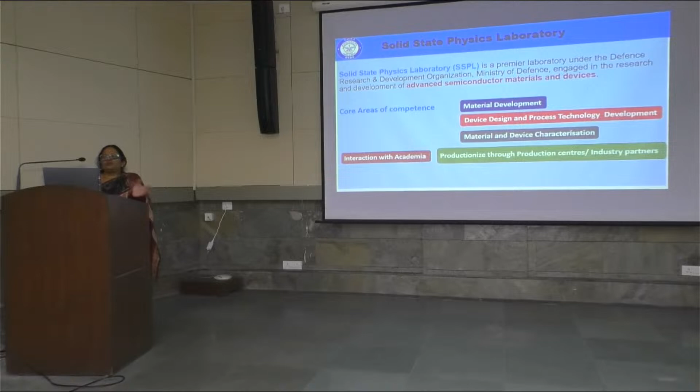So in the past, whatever we have developed at lab level, if we had to deliver a certain number, we used to do it in the lab itself. But somewhere in the mid-80s, we started developing our own production center. Primarily, we have two production centers. One for III-V gallium arsenide, gallium nitride, which is called GATEC at Hyderabad. And then we have a center called STARC at Bangalore, and it works on all the MEMS technology and other sensors. So these are our two production centers.

And we have a very active interaction with academia. And now the emphasis from DRDO side is also that we have to interact with academia. So whenever we take up a project, the design and whatever academia can contribute, we are looking towards it. And the thrust is also that whenever we take up a project, because we have to convert whatever we are developing into a product, we have to handhold the industry partner right at the beginning when we conceive the project. So this is the model which DRDO is following right now and what we are also following.

So basically these are our areas of work. We are working in a variety of fields. We are about 350 personnel, with 150 scientists and 150 technical staff. And we work in the area of RF devices, basically gallium arsenide, gallium nitride. And we start right from the material to the device to productionization at GATEC, as I mentioned.

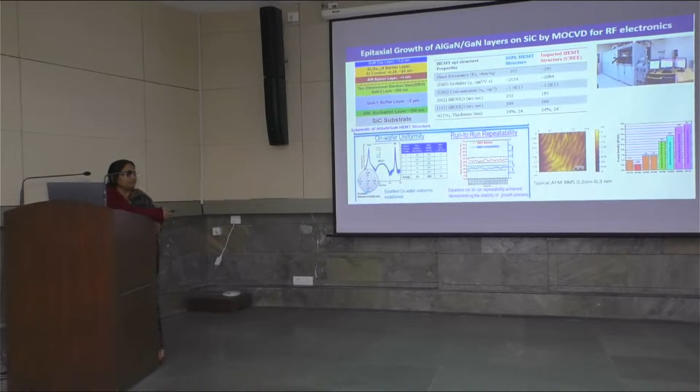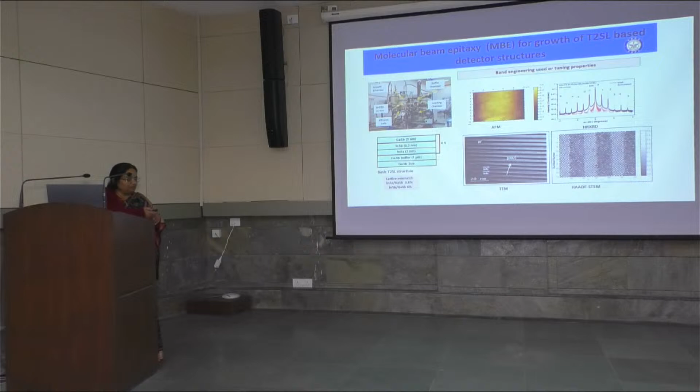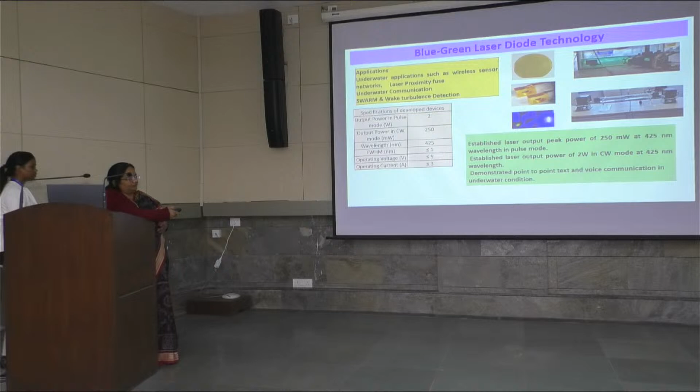So now this sensor system plus the data acquisition system, because the sensors are placed where the avalanche is expected, and then you have to generate a lot of data. So these are placed and data is collected throughout the year, and this is then given to the user, who then develops a model for avalanche predictions.

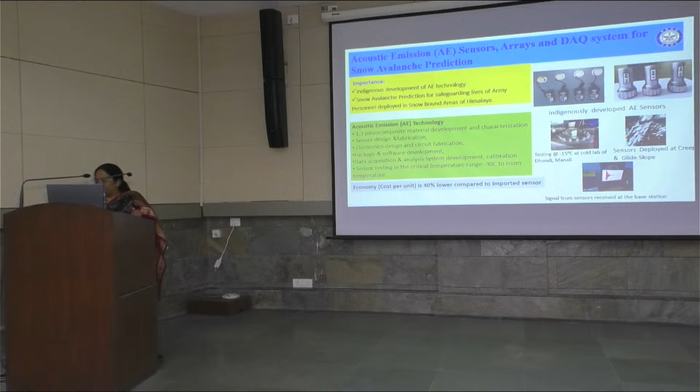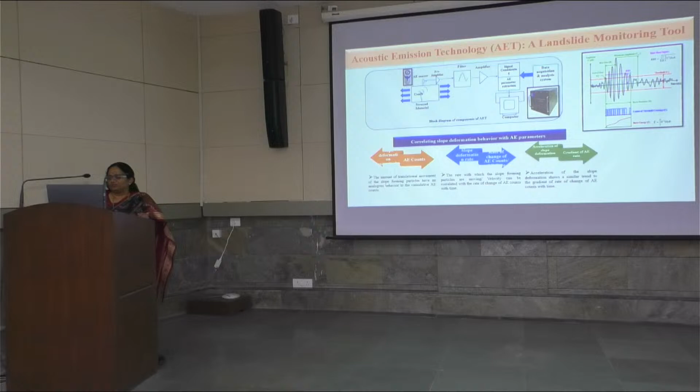So this is one technology we have been working on, and as a consequence of this, we are also working on landslides. It's a similar principle, the design is different, and the same thing, that you have to place your sensors at vulnerable areas and collect enough data so that you can develop a model for prediction in future. The model is not our job, we basically develop the sensors, sensor and the sensor systems.

This is very important because there are several places where you would like to know the temperature during operation. Suppose you have a turbine rotating at very high speed and you cannot place your sensor there, you need to have it in a wireless mode. So this is a possible solution which we have taken up recently. Basically you have the sensors mounted wherever you want the temperature during operation, and then you have an interrogator unit which sends a signal and you can collect data so that you get a real-time picture of what is happening while the system is operating. This is basically the same thing.

And then we have a CNT-based chemical sensor. CNT work was done about 7 years back, and based on that, some sensors have been developed for detection of ammonia and NO2. This has now been tested, and we have made the prototype, and it has been given to some users so that they can test it out. The fabrication of this we are now doing at STARC. It has not yet started, but this is what we plan to do.

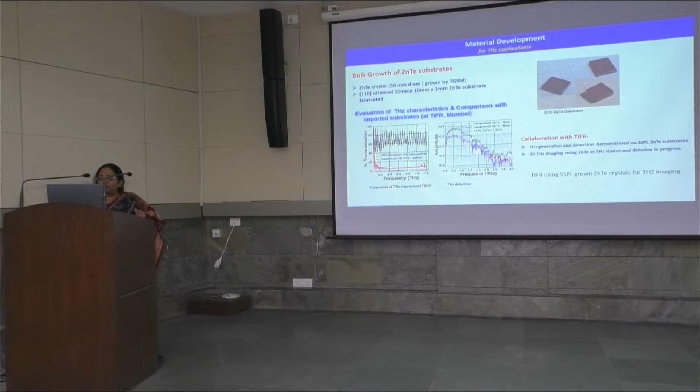Then zinc telluride is another terahertz material which we are working on, again for terahertz transmission and terahertz detection purposes. There is a very active group at TIFR which has been working in this area. So we have given our substrates to them, whatever we have developed. They have tested it, and now they're in the process of developing the complete terahertz system for imaging using this. Then graphene based terahertz modulator and detector have also been developed. This has been demonstrated. Now we have to work further to develop the systems.

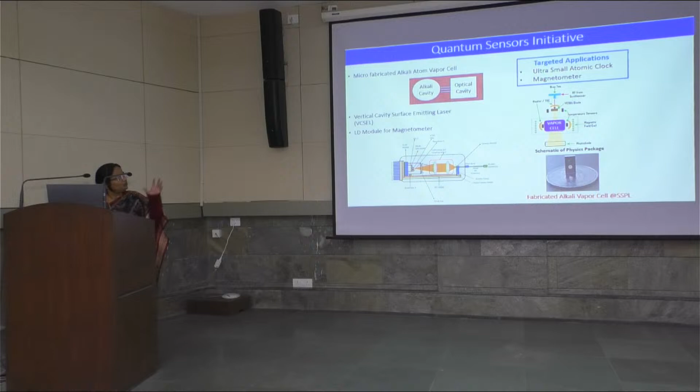Then there is a quantum sensors initiative also. Basically, we are working on 2 applications, which are the ultra small atomic clock and magnetometer. Wherever there is no GPS, you need to have the communication, so the atomic clock is targeted for that, and the magnetometer for underwater application for detecting the magnet, ultimately for submarine detection. But these are at the nascent stage. The concept is there and the design is there, but when we are actually executing it, you see that there is a lot of gap in the electronics which we need to develop, and that is what we are right now looking at. So these are some of the things which may be of interest to all of you.

So if you want to know how DRDO is interested in working with the academia, right now there is a strong thrust on DIA CoE, that is the Defence, Industry and Academia Centres of Excellence. About 15 of them have been opened in various IITs and IISc, and you can look at our website on a range of technology. Basically, the idea is to build multidisciplinary collaborative teams for development of advanced technology for futuristic defence. So they want the student community, the academia, the niche technology industries to come together to provide these solutions.

And the other way in which academia can collaborate with us is through our directorate of ER and IPR, in which basically you submit project proposals and they screen them for the application to defence. If they get through the screening, then they are sent to the domain lab, whichever is interested, and then they are evaluated and processed for further sanction. Apart from ER and IPR, we also have 4 research boards: aeronautical, armament, life sciences and naval. You can go through the website and see where whatever work you are doing fits.

And then there is another mode which is initiated at the lab. Suppose we have a project and we have a need, a gap somewhere which needs to be filled, a knowledge gap or technology gap. Then how we go about it is we look at literature and look around us and see who has some experience in this field. Then we contact them, take proposals from them, have discussions with them and see if they can help us fill that knowledge gap. So most projects now have 1 or 2 CARS proposals right at the initial stage before the project is taken up.

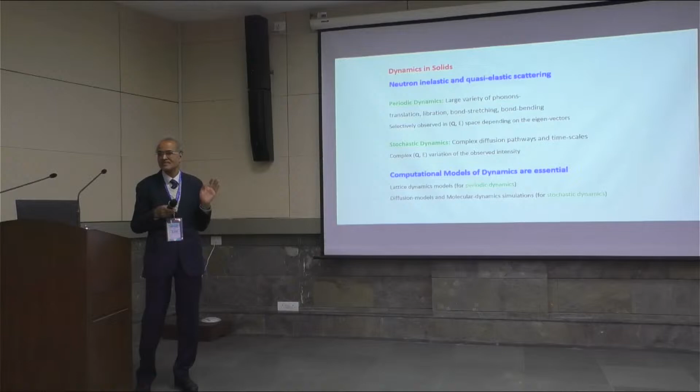So the subtopics we work on are, you see, dynamics in solids. There are two kinds of things. We have periodic dynamics like phonons, etc., and we also have stochastic dynamics like diffusion. Okay, and so we primarily use the technique of neutron scattering. There are two varieties: inelastic scattering and quasi-elastic scattering. You can see the periodic dynamics as a large variety. And now, because these are so complex in complex structures, you heavily depend on computational models of the dynamics.

Yes. Okay. So, inelastic scattering is used to study periodic dynamics, and quasi-elastic scattering is used to study diffusion. And the kind of things it has is phonon dispersion relations or diffusion, and data analysis are done by lattice dynamics and molecular dynamics. To go a little further,

so neutron scattering is like Raman scattering. Essentially, what happens is you have an incoming radiation, you have a sample, and you have outgoing radiation in different directions, and you look at the energy and momentum conservation. So, like in Raman scattering, the radiation energy changes, and the change in energy is related to what excitations we are talking about. And similarly, there is a change in momentum. In diffraction experiments, for example, this is very different. So, what you need to really look at is the change in energy and momentum of the neutron radiation, and that allows you to study the dynamics.

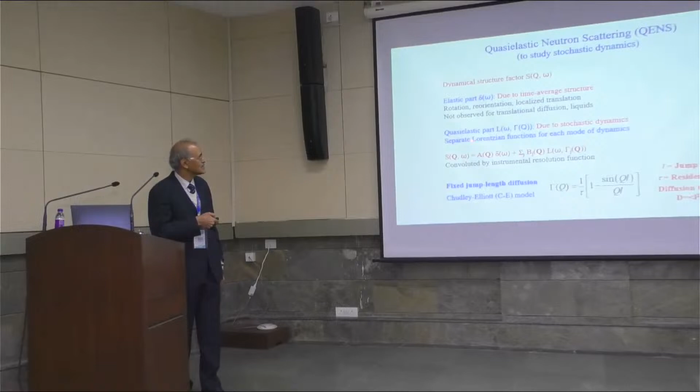Okay, so if you fit it with a Lorentzian function, then this width of the Lorentzian can be related to the different kinds of modes of the dynamics. So this is a fairly involved process, but well, I don't have to bore you with all that. I mean, just to give a flavor that these are the kind of things that are done. So you do the fitting and so on.

And then the width of the Lorentzian function, that is the width of the broadening of the elastic line as a function of the momentum transfer, can be related to certain models. This is one of the simplest models. For example, in a crystal lattice, atoms don't diffuse exactly like a liquid. They may be jumping from site to site, and there is a certain time it takes for a jump and so on. So typically one can think of a residence time between two jumps.

How long does the atom stay at one place on the average? This is stochastic, so these are not fixed numbers, and then the diffusion coefficient can be found by substitution. So this is one of the simplest models for these processes.

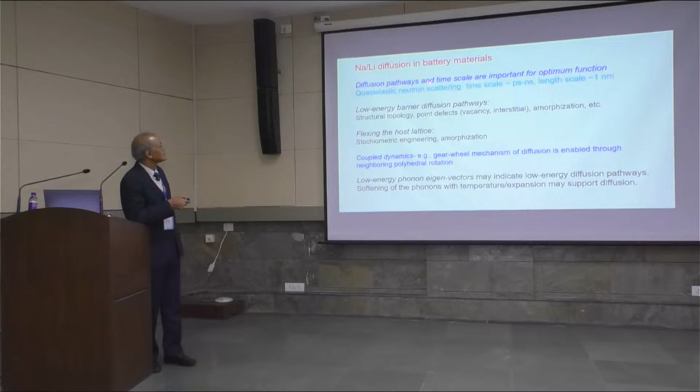Okay. Now coming to certain specific aspects. So we are interested in lithium or sodium diffusion. For lithium, you are very well familiar, lithium batteries are used, and right now one is interested in whether you can improve upon the solid materials. Maybe lithium in a liquid state would be different, but solid electrolytes are a focus, which are more convenient to handle, and there are certain advantages.

And alternatively sodium, because lithium is in short supply and has its own problems, and sodium is abundant. So there is a focus on sodium battery materials. Okay. Now, as basic scientists who are interested in the atomic-level understanding of these materials, what are we interested in? Okay, crystal structure is one that crystallographers can look at and so on.

What we are looking at is the diffusion pathways and time scales. So within a given crystal or solid, what are the diffusion pathways and what are the time scales at which the diffusion processes take place, and how this can be beneficially improved upon for practical uses. So this is the eventual aim.

And then you can very well imagine that you are looking for low energy barrier diffusion pathways. If the energy barrier for diffusion is small, then those will provide preferred pathways. And that is what we would like to find out within materials. And these can be helped in various ways.

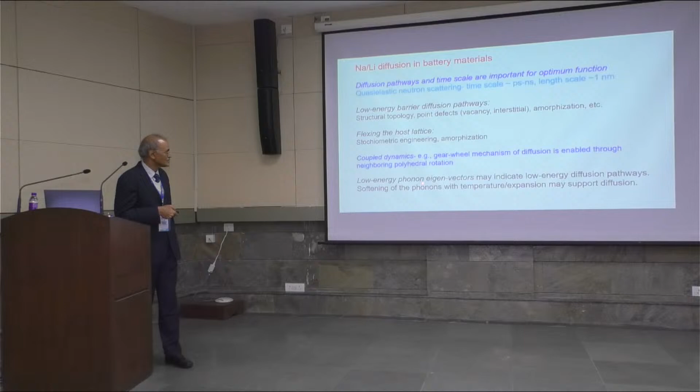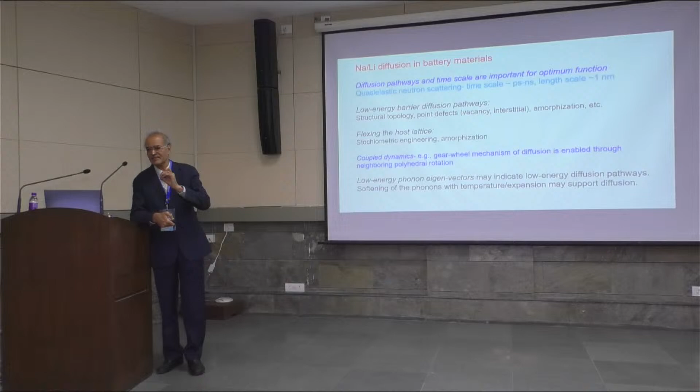Okay, then it is also found that, depending on how the structure is engineered, you may find very low energy phonons associated with the diffusing lithium or sodium atom. As I said, it's not a liquid-like diffusion. Most of the time, the atoms are located at definite sites and they jump from site to site, and that is how the ionic conduction or diffusion takes place.

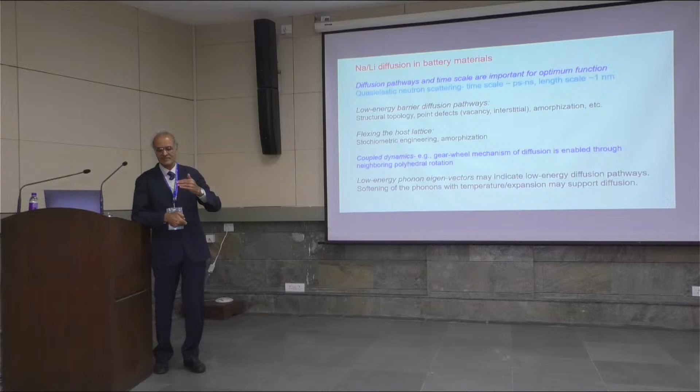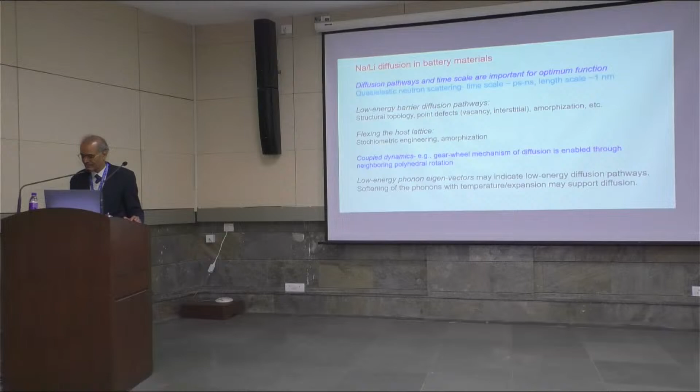So, low energy phonons, and the eigenvectors of these phonons may be related to the low energy diffusion pathways. And moreover, the softening of the phonons, that means the reduction in the phonon energy or frequency as a function of temperature or thermal expansion or by other means, can be supportive. So this is the broad outline. Now let me take a few examples that we have investigated.

Okay, over the last few years, or couple of years, we have looked at materials like sodium aluminum silicate or lithium aluminum silicate. These experiments were done at the Oak Ridge National Laboratory, and we have done all the...

Okay, see, the way we operate is that we do certain preliminary work in our center, and we propose experiments to these advanced laboratories, and we get the beam time. Then we can use it and get the data, analyze, compare with our models for the computational calculations, and then try to get the things out of it.

Another is the amorphous materials. As I said, amorphization also helps. Then one recent paper that we have published is on a sodium zinc gallium sulfide material, where the topology of the structure is found to be very suitable for diffusion.

Okay, then there are some recent papers on phonon related aspects. These same technologies are also useful for, for example, solid oxide fuel cells, where the diffusion of oxygen atoms is very important. So, fuel cells can be... okay, so the first example I will take is

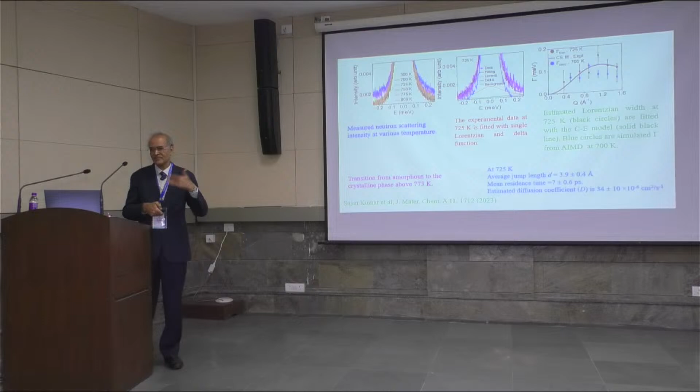For that there can be other experimental methods, but what we have done is through simulations, and then you can find out. So, for example, the typical average jump length of the lithium atom is typically 4 angstrom, which is related to some kind of interparticle distance, and there's a typical jump time of a few picoseconds. There is a certain diffusion coefficient.

Okay. Now you can also, for example, in a simple molecular dynamics calculation, calculate the mean square displacements of atoms. In a crystalline material, the mean square displacement does not change with time. These are just the phonon vibrations. The mean square displacement is practically independent of time, and it increases with the temperature. But this does not indicate diffusion. However, if the mean square displacement increases with time in a molecular dynamics simulation, then that indicates diffusion.

Okay, so in this amorphous material, the diffusion coefficient is related to the slope of this function. So from that one can identify this. Then another quantity that is calculated is what is called a self-correlation function. It's a correlation function between a lithium atom at a given time and at a future time.

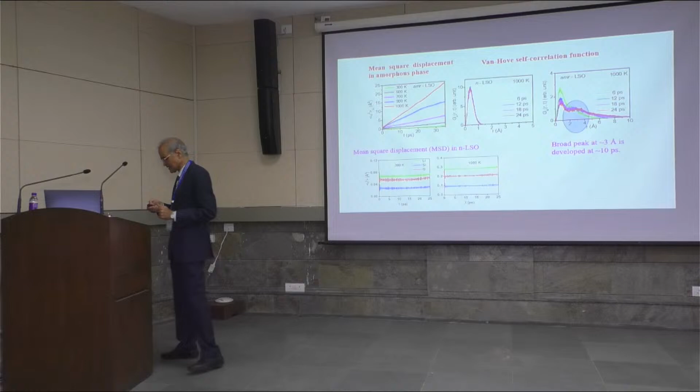If you calculate that, in a crystalline material what you find is that there is just one peak, typically, let's say, half an angstrom, and this is related to just the mean square displacement, phonon kind of vibration. However, in this amorphous structure where there is diffusion, the self-correlation function first develops a second peak and then further broadens. This indicates how, as a function of time, the atom is jumping from an initial site to another site. So that's how one can look at it.

Okay, how much time do I have, sir? You can continue. Okay, fine, thank you. You can stop me anytime.

So in the molecular dynamics simulation, as you know, you calculate the trajectories of atoms as a function of time, typically in the order of picoseconds. If you look at this, for example, in a crystalline material the atoms are located at definite sites, whereas if diffusion is taking place, this will not be so. These are just the probability isosurfaces.

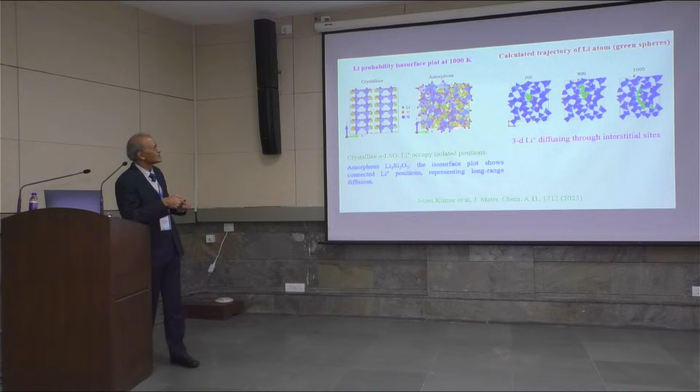Incidentally, the temperature has to be very high because in a small simulation, see, in the real world you can go up to seconds or minutes, but in simulation the atomic trajectories are calculated over a fraction of a picosecond. Precisely for that reason, if you increase the temperature, you can accelerate the process. So it is artificially done. This way one can identify what exactly is happening at the microscopic atomic level.

Then if I just pick up one atom and see how its root mean square displacement is changing, in crystalline material it is a constant. Here, this is the displacement from the original position. You can see that it shows some variation, then it shows a jump. So this is like jump dynamics. Whereas in amorphous material it is more a mix of jumps as well as a liquid-like continuous process. So this is the microscopic understanding.

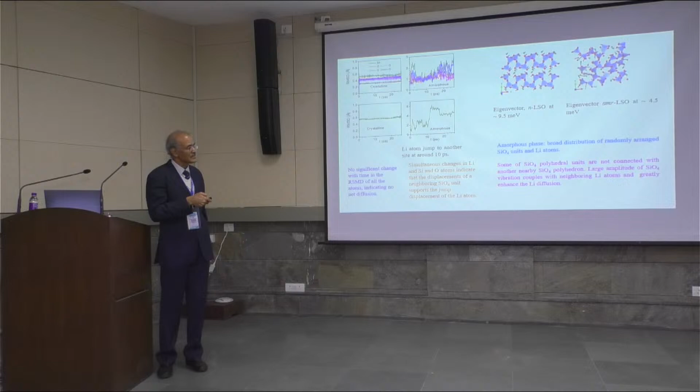And if you do lattice dynamics calculations where you can calculate the phonons and phonon eigenvectors, then you can identify specific phonon eigenvectors for different phonons and see what kind of dynamics is taking place.

Okay, so what we have learned from this is that the molecular dynamics simulations revealed that in the amorphous phase, you have different orientations of the silicate polyhedra, and several accessible pathways open up for lithium diffusion. This is not available in the crystalline material due to definite fixed orientations, so we are not able to see it.

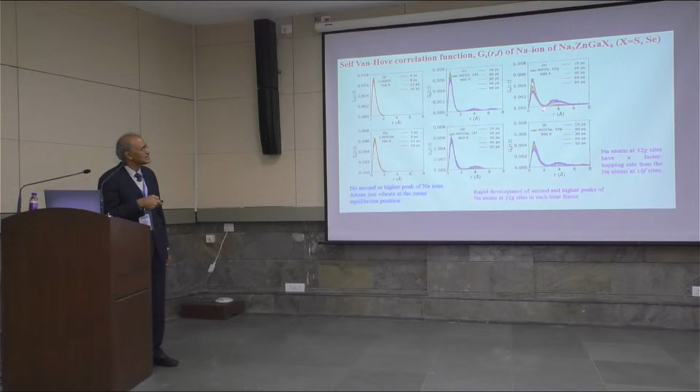This is again the self-correlation function that tells, as a function of time, how the second peak develops. The first peak is the self-correlation of the atom as a function of distance from the initial position at zero time. In the beginning, you have just phonon kind of vibrations, and as time proceeds, the atom would have jumped to another site at a distance, so the same atom at a later time is located at a different position. So this helps us identify the jump lengths and jump times in this process.

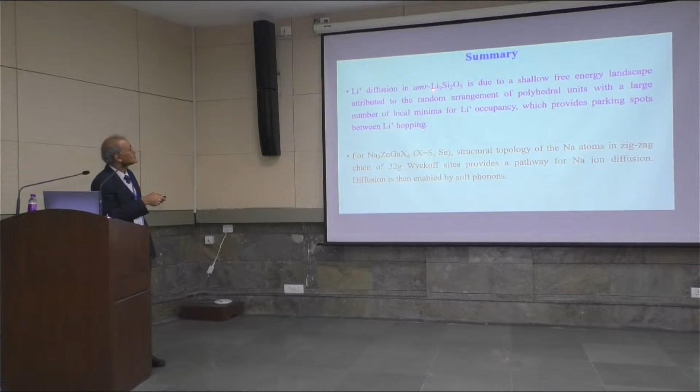So in this part of the talk, there are two things identified. In the amorphous structure, there is a shallow free energy landscape, attributed to random arrangement of polyhedral units with a large number of local minima. And in the sodium material, the second material, there is structural topology of the sodium atoms in zigzag chains of certain sites that provides the pathway for sodium diffusion, and the diffusion is enabled by soft phonons.

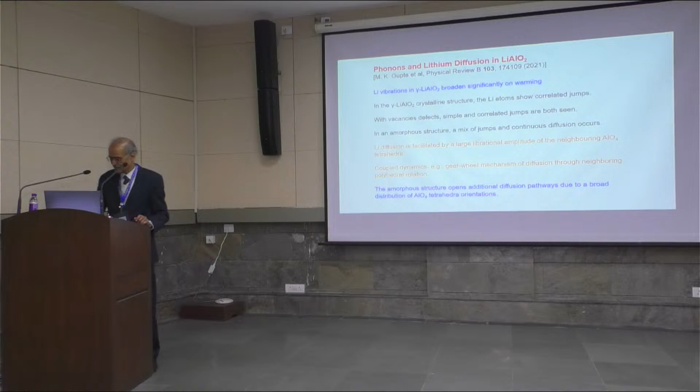How much time, sir? Okay. So, in no further time, I will jump over this other example and just go to the end.

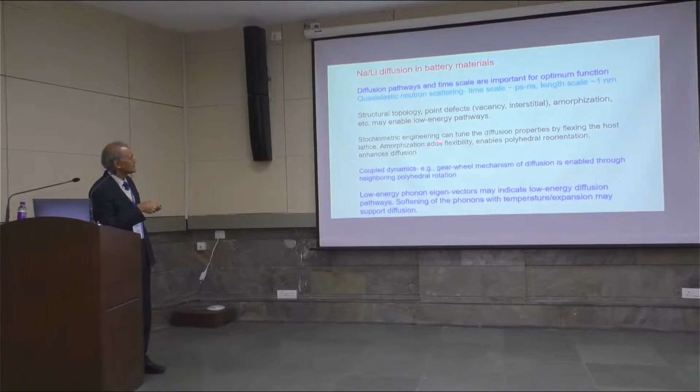So just to summarize, we have looked at the diffusion pathways and time scales, and the structural topology and point defects that are available. Then stoichiometric engineering can help in identifying the diffusion processes, by flexing the stoichiometry, coupled dynamics, and the low energy phonons.

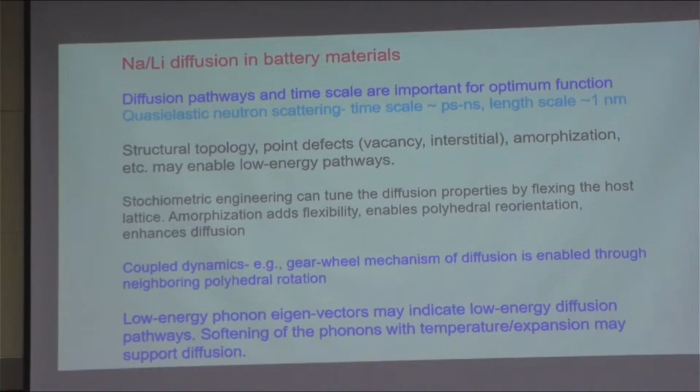Yeah, thank you. It was a fantastic lecture. It started with the energy devices, with the simulation of the experiment. For me, the beauty of this lecture is the physics and the atomic dynamic characteristics of the solid state material, which you have covered very nicely.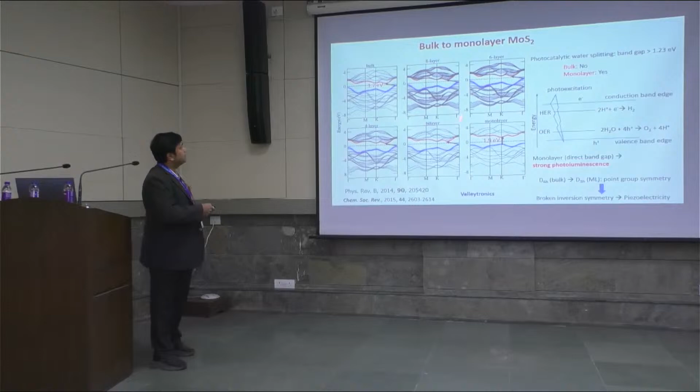So, as we are all aware, novel properties arise at the nanoscale, which are usually non-existent in the bulk form of the materials. We can use molybdenum disulfide, the most widely studied two-dimensional semiconductor, as an example to understand that. So, molybdenum disulfide comprises a multi-layered van der Waals solid, and when it is thinned down to the level of a monolayer, several interesting properties arise, like this and that. But we are particularly interested in this one.

So, as we are moving from a bulk multi-layered van der Waals solid MoS2 to a single layer MoS2, what happens is that the point group symmetry changes, the symmetry is lowered, the inversion symmetry is broken, as a result of which piezoelectricity as well as valleytronic properties arise in single layer MoS2.

Now, theory has preceded experiments in several instances, including the prediction of piezoelectricity in two-dimensional materials. Piezoelectricity in two-dimensional materials was discussed in this JPCL paper in 2012. And then a few years down the line, it has been observed and confirmed experimentally in these two papers from the Nature group. And the origin of piezoelectricity is the broken inversion symmetry.

So as you can see, this is the supercell of MoS2. Here the two atoms are different, so the inversion symmetry is broken here. Therefore, it shows piezoelectricity. However, in graphene, both the atoms are the same. The inversion symmetry is present in graphene, therefore it doesn't show any piezoelectricity.

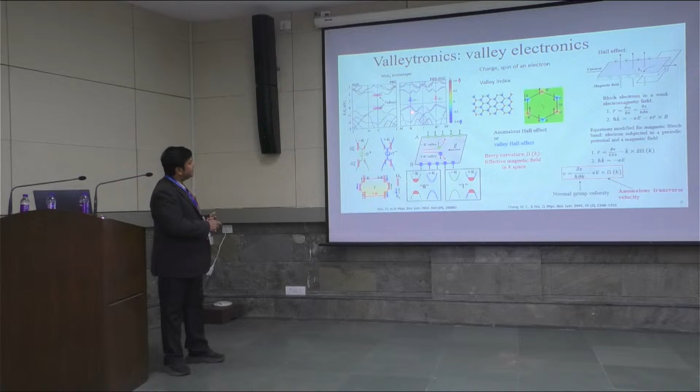So the carriers in this valley, upon the application of the in-plane electric field, acquire an anomalous transverse velocity, and the carriers undergo a Hall effect, which is called the anomalous or Valley Hall effect. And very few materials are experimentally known which exhibit the Valley Hall effect. Those materials are mainly MoS2-like, which show a large Zeeman-type spin splitting at the valence band and a very small splitting at the conduction band.

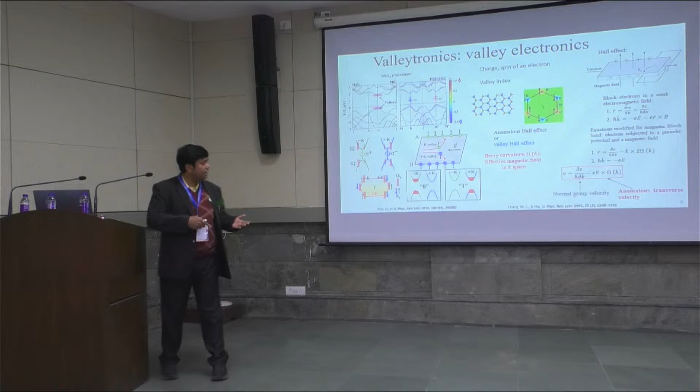So since this is an emerging field of research, in order to facilitate the development of this area, we have contributed a few monolayers. We have proposed a few 2D materials which show properties complementary to that of MoS2. So this is our little contribution to this area, and I'll be mainly focusing on these two works in this talk. So this HfN2 monolayer was predicted using the particle swarm optimization technique as implemented in CALYPSO, but we have explored the valleytronic properties in this material.

It shows a large Zeeman-type valley spin splitting at the conduction band edge, which is complementary to that of MoS2. It shows a large splitting at the valence band. Now, if you replace sulfur by a heavier element, that is tellurium, the spin-orbit coupling will be higher, and as a result of which the splitting will also be higher in this case.

So when HfN2 monolayer is stacked on top of molybdenum telluride to form a van der Waals hetero bilayer, a type 2 band alignment arises in it. As a result of which, we are able to realize a large Zeeman-type valley spin splitting at both the conduction band and the valence band. So this will be ideally suitable for valleytronics applications, because in a van der Waals hetero bilayer one can prolong the lifetime of valley polarized excitons. I will talk about the type 2 band alignment in the next few slides.

So then moving on, we have also proposed these monolayers for the integration of valleytronics with spintronics. This niobium nitride monolayer or tantalum nitride monolayer, they have a hexagonal honeycomb lattice and a polar buckled structure. Because of the polar buckled structure, an out-of-plane electric field intrinsically arises in it, which induces momentum-dependent spin splitting, and that gives rise to a Rashba constant.

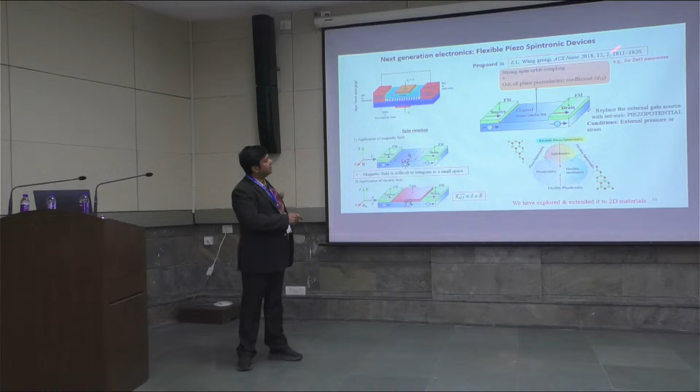And low dimensional materials by default have a low elastic stiffness constant, and therefore they are flexible and stretchable. Such a pointer was given in this ACS Nano paper by the group of Z. L. Wang on one-dimensional zinc oxide nanowires, and we have extended this concept to two-dimensional materials. So we have proposed a couple of monolayers which exhibit a combination of all these three properties, like ZnTe and CdTe monolayers. They have a polar buckled structure and a hexagonal honeycomb lattice as well.

And because of this structure, the polar buckled structure I have been mentioning to you, intrinsically an out-of-plane electric field arises, which induces momentum-dependent spin splitting in the conduction band, as you can see. So one parabola splits into two parabolas. This is the momentum-dependent spin splitting, and this is the Rashba constant. And you need a high Rashba constant for spintronics applications.

And also we are aware that spin-orbit coupling is proportional to Z to the power 4. So cadmium is heavier than zinc, and therefore it shows a larger Rashba constant. And also because of the broken inversion symmetry, an out-of-plane electric field arises in CdTe and ZnTe. Likewise, the same thing applies to MgTe.

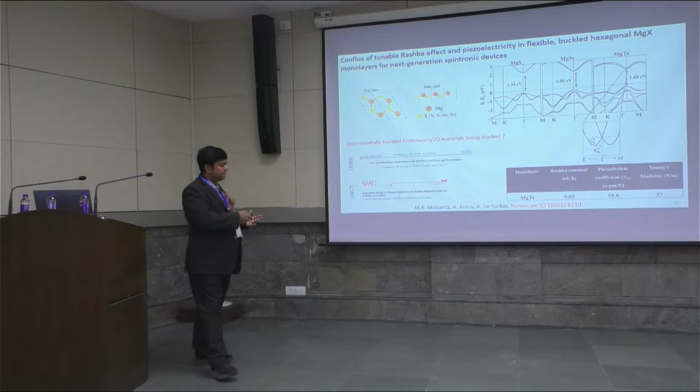So in summary, these three monolayers show a combination of all these three properties. They show a low elastic stiffness constant, so this criterion is satisfied, and they have a high Rashba constant and out-of-plane piezoelectric coefficient. Therefore, we propose that these monolayers will be suitable for flexible piezo-spintronics. And our findings and similar findings we have compiled and reviewed in this invited topical review, which I was invited to contribute last year.

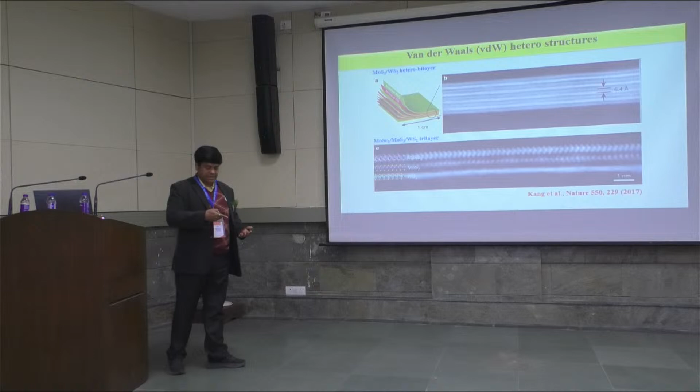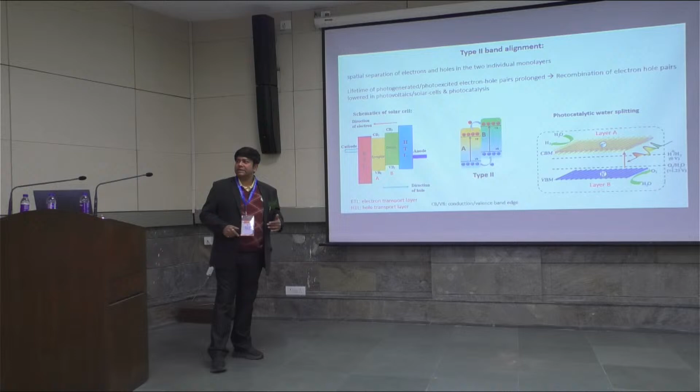So it's time to switch gears to van der Waals heterostructures. Van der Waals heterostructures have mainly been studied in light harvesting applications, for example, in photovoltaics and in photocatalysis. Because of the type 2 band alignment, the electron-hole pairs can be spatially separated in the two individual monolayers. And now, as Professor Pandey mentioned in the morning, interface-driven properties were overlooked.

Say, for example, piezoelectricity which might arise from interface effects or from interfacial polarization was completely overlooked. Piezoelectricity in van der Waals heterostructures was completely overlooked until we predicted it for the first time in this paper. And we have evidence to substantiate the claim, and kindly bear with me, I'll show the evidence in the next few slides.

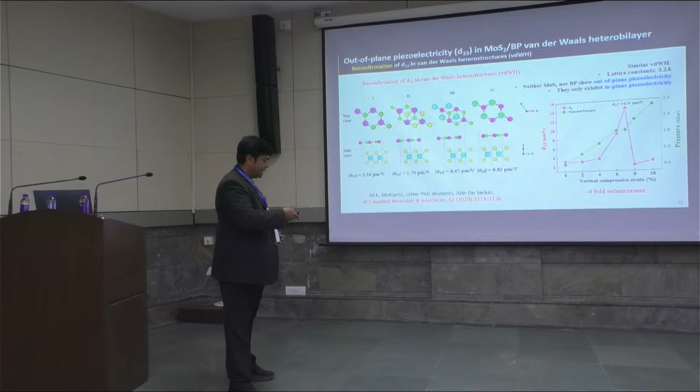And here what we find, again, is interface-driven properties. When the two monolayers are subject to a vertical compressive strain, there's a four-fold enhancement in the out-of-plane piezoelectricity. Now, moving on.

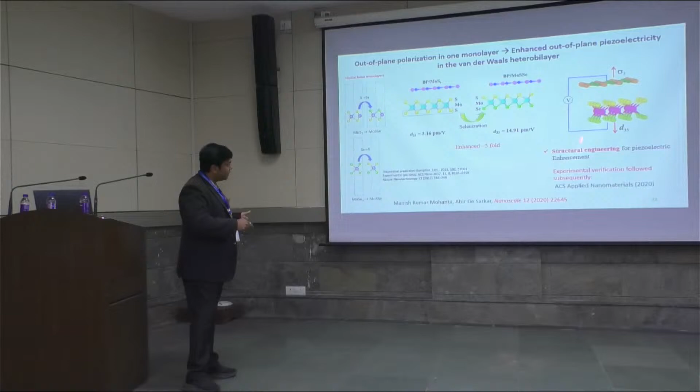So now Janus structures have been experimentally synthesized. MoSSe has been experimentally grown. So what if we replace MoS2 by MoSSe? If we introduce a mild out-of-plane polarization in one of the individual monolayers, we find that there is a five-fold enhancement in the out-of-plane piezoelectric coefficient, which has been confirmed experimentally on a similar system.

So in summary, these are the first theoretical predictions of the occurrence of out-of-plane piezoelectricity in van der Waals heterobilayers, which has been confirmed on a similar system, and they have cited our papers, and that's how we have come to know.

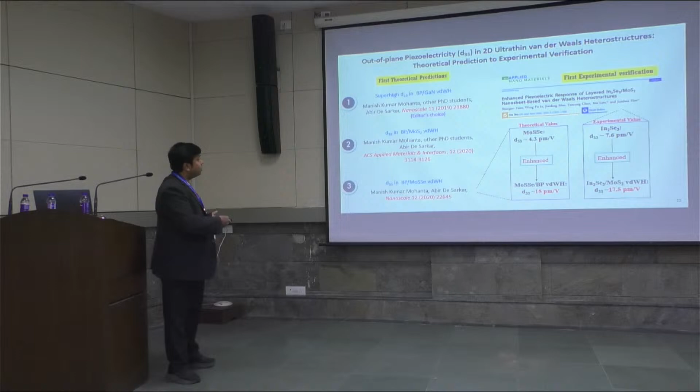And also in this review article, they have duly acknowledged us. Piezoelectricity in van der Waals heterostructures was first predicted by Mohanta et al. Manish Mohanta happens to be my former PhD student. And our work on Janus structures has also been discussed in this review article.

So now we usually calculate the piezoelectric coefficients. Experimentally, we measure the piezoelectric coefficients, but we usually ignore the sign of the piezoelectric coefficients. The sign of the piezoelectric coefficients can be important even from fundamental perspectives. So we have ascertained the origin of the negative piezoelectric coefficient. We find that it arises from a small out-of-plane elastic stiffness constant. In van der Waals heterobilayers, you have a small out-of-plane elastic stiffness constant. So that gives rise to a negative out-of-plane piezoelectricity. That is what we find over here.

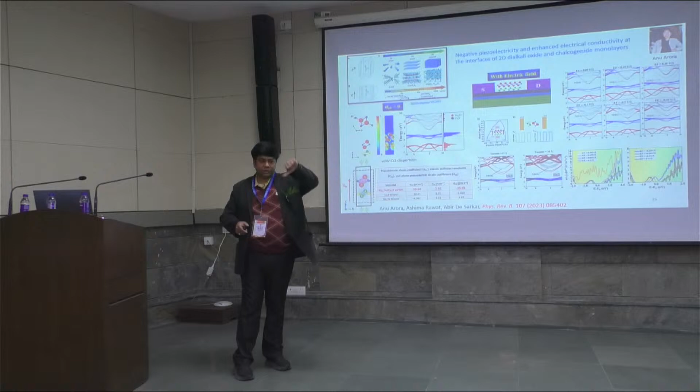And these monolayers show nearly free electron gas states having a parabolic dispersion similar to that of graphene. This arises from the image potential surface states as in graphene. And in this van der Waals heterobilayer, when the electric field is applied along plus Z or minus Z direction, these NFEG states reach the Fermi level and enhance the electrical conductivity.

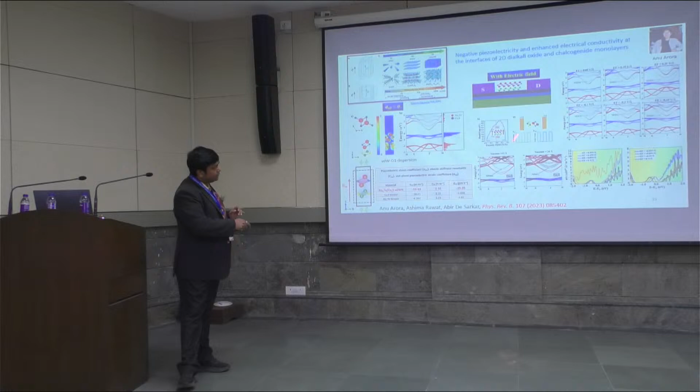And now coming to non-van der Waals solids. Normal solids are non-van der Waals solids, right? Normal solids are more abundant than van der Waals solids such as graphite or MoS2, and the usage and applications of non-van der Waals solids are much higher than that of van der Waals solids. And also, recently, experimentally, a few layers of normal solids have been exfoliated, and this success has stimulated a surge in research interest in non-van der Waals solids.

So here, these scandium pnictide monolayers are stable in the wurtzite phase in the bulk structure. So computationally, we have exfoliated a single layer of scandium pnictide, and we have optimized it. It is found to be stable, having a hexagonal honeycomb lattice structure, and it shows a very small Young's modulus, so therefore it is super flexible. And then we have explored several other properties in scandium pnictide monolayers.

So usually D16, this is D16, I think this is not okay. The clarity in the pictures, okay.

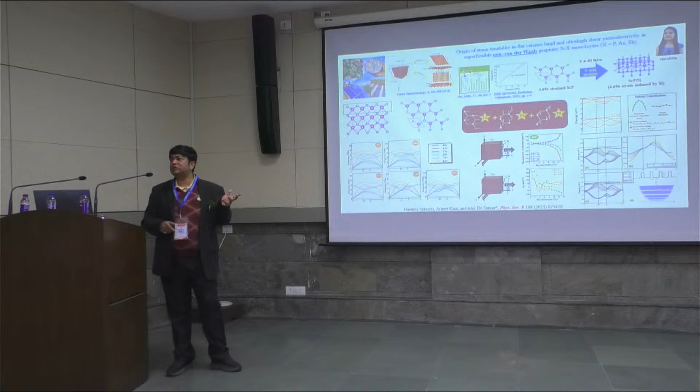D16 is the shear piezoelectric coefficient. These are normally overlooked and ignored in two-dimensional materials, and they are usually studied in helical structures such as DNA nucleobases. And interestingly, these monolayers show a shear piezoelectricity. Shear piezoelectricity is like this. If you apply a torsion, a shear about the Z direction, polarization is induced along the X direction.

Right? And so under the application of biaxial strain, we find that there is a complex mixing of these three phonon modes. They are most sensitive to the application of strain. The other phonon modes are relatively insensitive to strain. And that is understood to enhance the shear piezoelectric coefficient in these monolayers. A systematic variation is observed in the piezoelectric coefficient D16 with biaxial strain, and under biaxial strain, D16 exceeds that of the beta glycine molecule, which shows the highest D16.

And if we pay attention to the top of the valence band, we find a heavy hole band and a light hole band. So the in-plane orbitals constitute the light hole band, and the nearly flat bands arise from the out-of-plane orbitals. So therefore, if strain is applied, the hybridization between the out-of-plane orbitals gets reduced, so the bandwidth is reduced, and therefore strain flattens the bands further. That's what we understand from here. Okay.

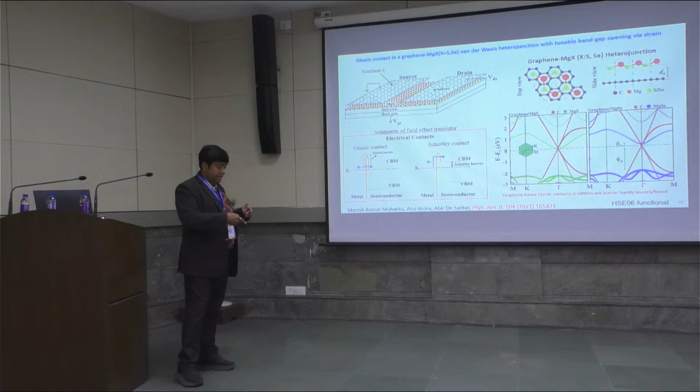So now the nature of the ohmic contact, whether it is an N-type or a P-type ohmic contact, is found to be sensitive to the stacking sequence, whether the chalcogen atoms face graphene or the magnesium atoms face graphene, because this is the band alignment in the absolute vacuum scale, and when the van der Waals heterobilayer is formed, the potential step is different. It varies because the interfacial polarization varies from one stacking sequence to the other. So in the end, we get an N-type ohmic contact in this stacking sequence and a P-type in this case.

And then we have also opened the band gap in graphene by the application of vertical compressive strain. This has relevance to Professor Pandey's talk in the morning. When the two layers are brought closer to one another, there is a strong hybridization of the Pz orbitals. And when you go past the equilibrium distance of separation, there's a strong Coulomb repulsion. A cumulative effect of these two factors facilitates the opening of the band gap. The band gap which is opened is much higher than the ones reported earlier.

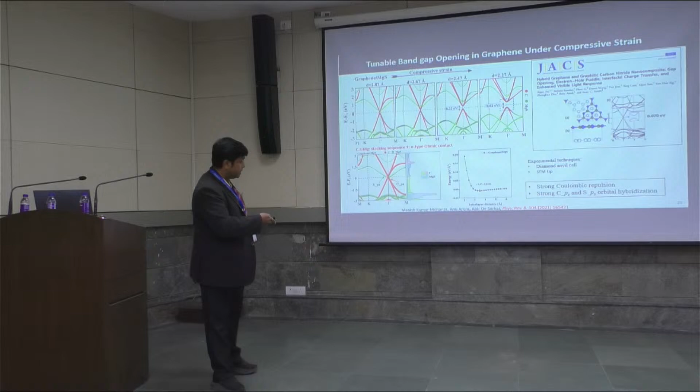And also, apart from our independent theoretical research, we also collaborate with experimentalists and provide them with strong theoretical support on different research areas, like catalysis, luminescence in atomic clusters, 2D materials, light harvesting, and so on. And hope I'm able to finish on time.

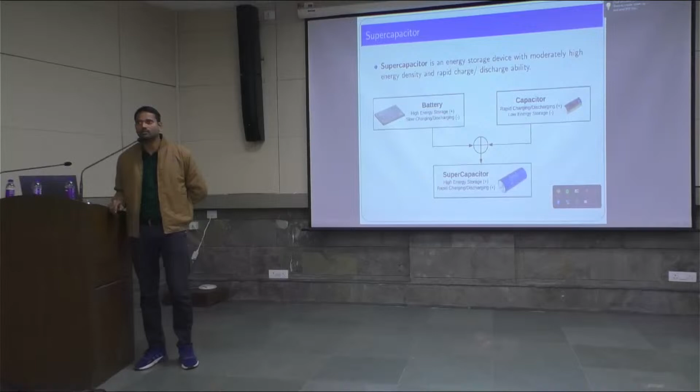Very good afternoon. I'm Dr. Shanti Bhushan, and the topic I'm going to talk about today is quantum capacitance in near valence doped nanosheets for asymmetric supercapacitors. To introduce, a supercapacitor is an energy storage device that combines the good attributes of both the battery and the capacitor. A battery offers high energy storage, but its charge and discharge process is very slow. A capacitor charges and discharges very quickly, but its energy storage capacity is very low. The supercapacitor combines the positive attributes of both, offering good energy storage capacity and rapid charge-discharge ability.

Supercapacitors are usually preferred wherever we require a rapid burst of power, such as camera flashes, or where we require less maintenance, such as space applications. However, supercapacitors also have one issue, which is the energy storage capacity. In comparison to normal capacitors it is high, but compared with batteries, its energy storage capacity is quite low.

The lithium-ion battery's energy storage density is 120 to 170 watt-hour per kg. For nickel metal hydride it is 40 to 100. For the lead acid battery it is 20 to 35, but for the supercapacitor it is 5 to 10 watt-hour per kg. So this research, by computational means, aims at increasing the energy storage capacity of the supercapacitor by enhancing the quantum capacitance of the electrodes. By enhancing the quantum capacitance, we can enhance the specific capacitance, and by enhancing the specific capacitance, we can enhance the energy storage capacity or energy density.

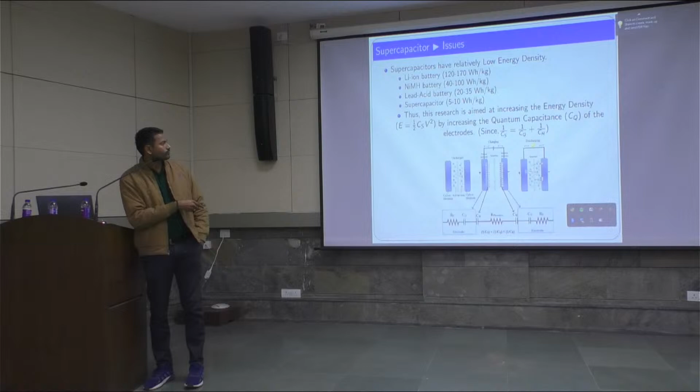Coming to the calculation mechanism, the quantum capacitance can be calculated using a few mathematical expressions. First we need the density of states data, which can be extracted using density functional theory tools. After extracting the density of states data, we have to do some MATLAB programming, or we can use any other programming, such as C programming. Here I have used MATLAB programming.

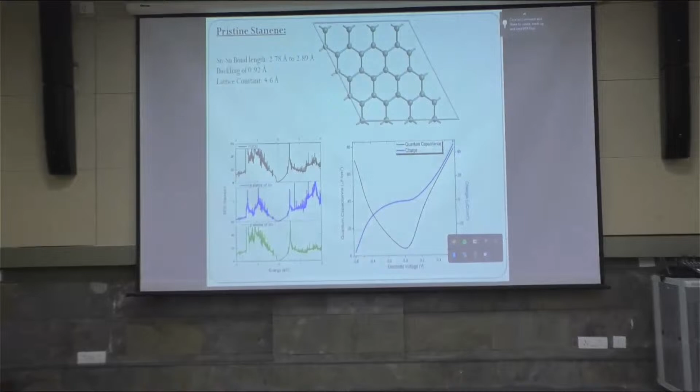This is the quantum capacitance curve for pristine stanene, and the charge storage curve also. The quantum capacitance offered by pristine stanene is around 77 microfarad per centimeter square, which is about 7 times higher than pristine graphene.

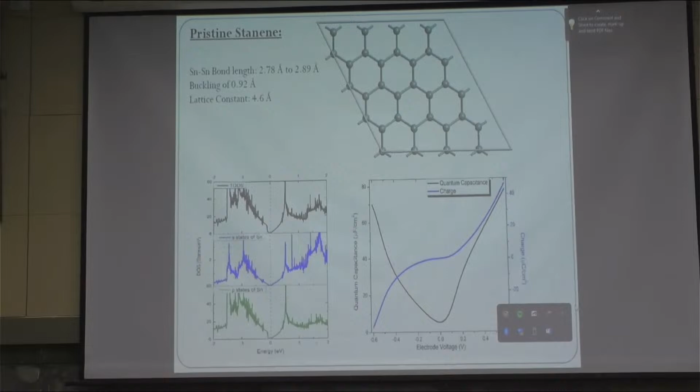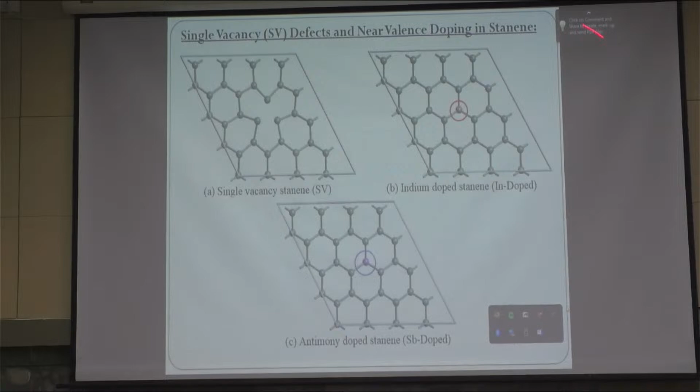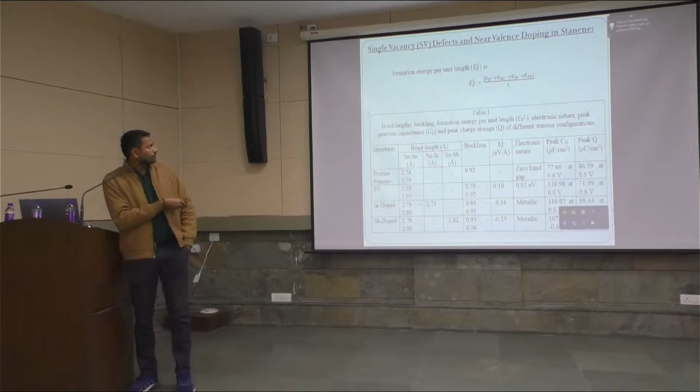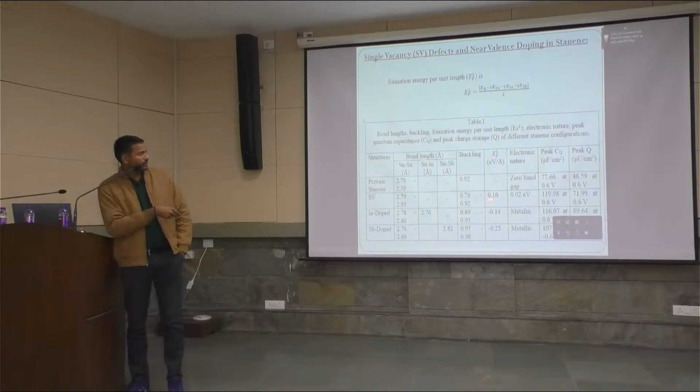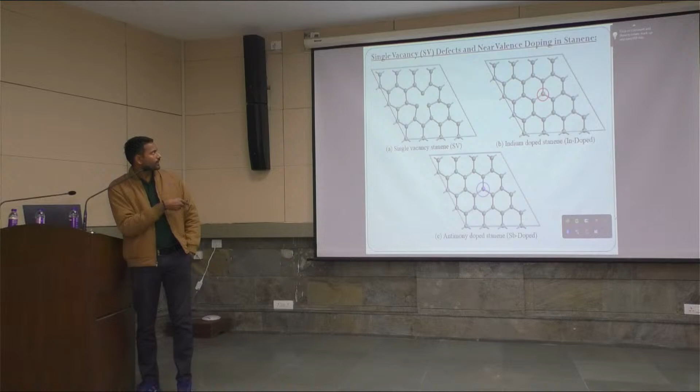However, when we looked at the formation energy, the stability is compromised; the formation energy is positive here, which means the structure is unstable. So to increase the stability and improve the quantum capacitance, we positioned the near-valence dopants, indium and antimony, at the SV site.

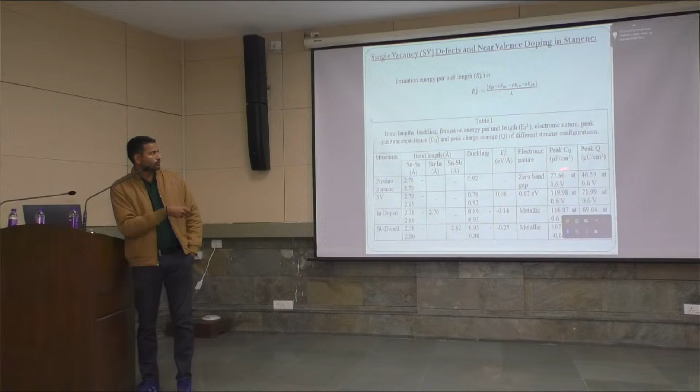Positioning indium and antimony has improved the stability. We can see the negative value of the formation energy here. The quantum capacitance also increased very much. It is 116 microfarads per centimeter square in comparison to pristine stanene of 77. Similarly, for antimony, it is 107.

To further study the different mechanisms, we introduced these near-valency dopants, indium and antimony, at the SV edges, single vacancy edges. Initially, one indium is positioned at the single vacancy edge. Thereafter, two indium atom dopants are positioned at the SV edges, then three indium atoms. Similarly, the antimony dopants are also positioned at the SV edges.

We have seen that as we position more dopants at the SV edges, the stability increases. This can be attributed to the elimination of dangling bonds by these dopant atoms. We observed that antimony offers better thermodynamic stability compared to indium in stanene, because antimony can offer a lone pair, but indium cannot. We think this is the reason for the better stability of antimony.

All these indium and antimony dopants offer quantum capacitance on the positive side of the electrochemical window. This says all these dopant structures are suitable for the anode electrode of an asymmetric supercapacitor rather than a symmetric supercapacitor, because quantum capacitance peaks are observed on one side only. So we can say these are suitable for the anode of an asymmetric supercapacitor.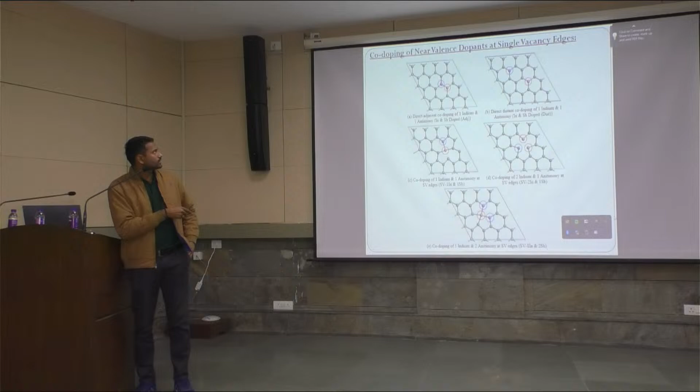Next we have studied the co-doping of indium and antimony in stanene, and we have positioned indium and antimony simultaneously in the stanene at different locations, at the single vacancy edges, and at the normal sheet also. And we have found that these co-doped structures are also suitable for the cathode electrode of asymmetric supercapacitor, because the quantum capacitance peaks are available on the positive side of the electrochemical window.

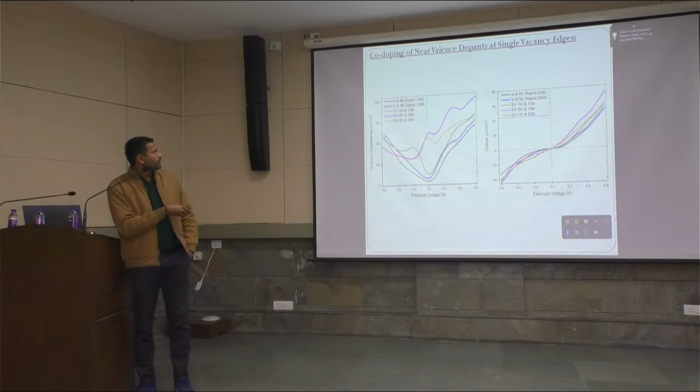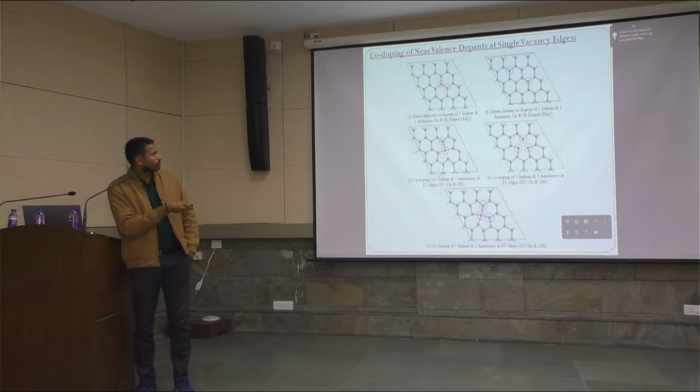Looking at the stability data and the quantum capacitance data, the quantum capacitance peaks are lower in comparison to the individual dopants. When we dope the individual dopants at the SV edges, we are having better quantum capacitance. But when we are co-doping indium and antimony, the quantum capacitance peaks are less. So instead of co-doping, it's better to go with the antimony doping in stanene.

Yes, this is the conclusion. Stanene offers 7 times higher quantum capacitance than graphene, antimony is a better dopant in comparison to indium, and co-doping is not that suitable, or may not be advantageous. These are the references, and thank you.

Thank you, Mr. Swaminathan, for the very good lecture. So, if any question, please. Yeah, Professor Khalid. Yeah, madam, please. So two questions actually.

One is, did you do dipole correction when you were doing vacancy calculations? No, sorry. Dipole corrections? Dipole correction. Second is that you have a very definite kind of arrangement of atom doping around the vacancy. Experimentally, how can one realize that? We are studying the possibilities because under experimental conditions it can go in any possibility. So in simulation we are doing all the possibilities, that is why we are doing all the possibilities.